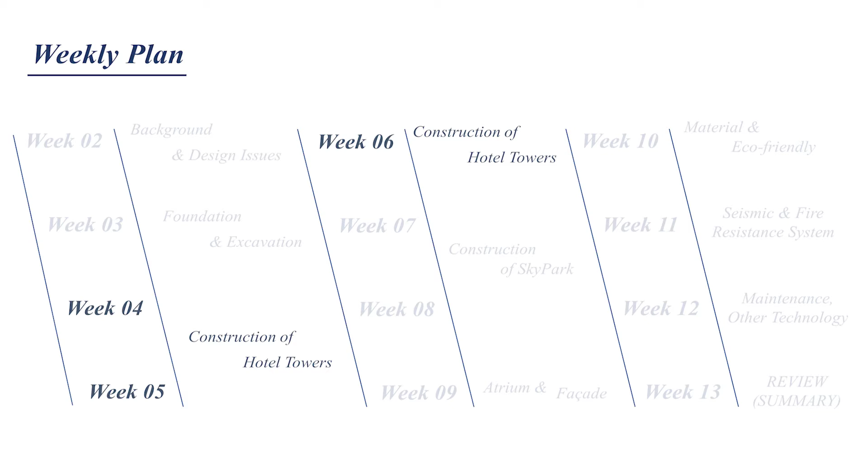The second week, we went through the Marina Bay Sands background and design issues. Last week, we talked about the foundation and excavation phase. Today, we're going to start with the construction of the hotel towers. But before starting this week's presentation, we'll briefly review the foundation of Marina Bay Sands Hotel.

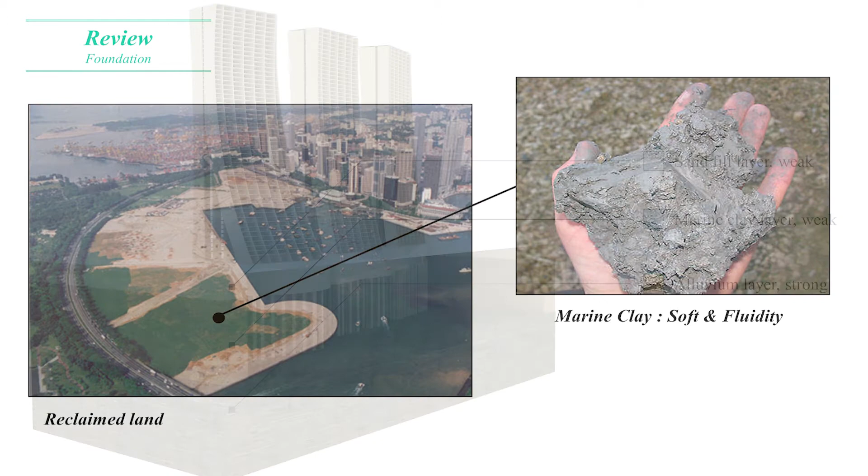The Marina Bay Sands is located on reclaimed land, which is newly created. The land consists of a large marine clay layer. This layer introduced two main problems for construction: one, it was too soft to support the weight of the building without causing large differential settlements; and two, the large horizontal ground pressure.

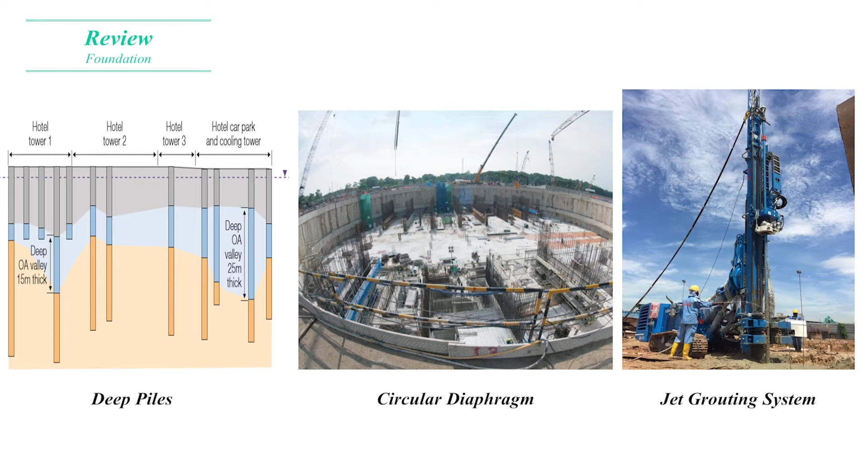We introduced three construction methods used to solve these two main problems: the deep foundation method, the circular diaphragm wall, and jet grouting. Today, we are going to talk about how the hotel towers were built on this foundation.

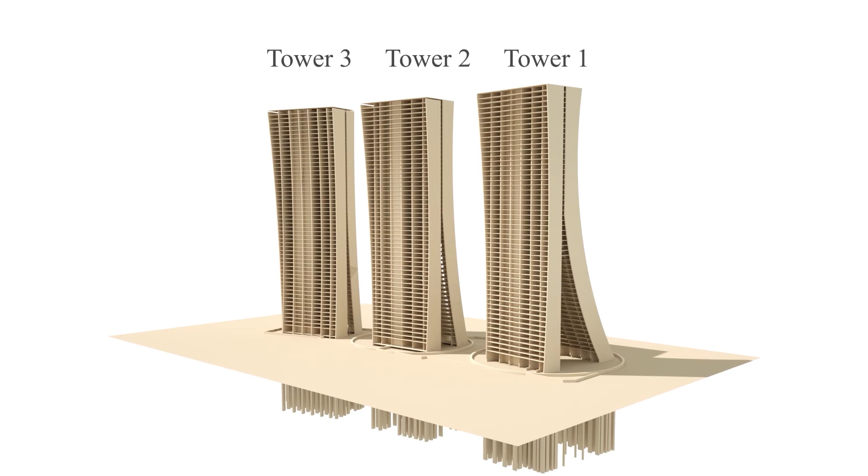The main design concept for the hotel was that the towers should resemble poker cards. This idea was developed into three different hotel towers, each with a unique inclination. Tower 1 has, as a result of this design, a very sharp angle of 26 degrees for the sloping structure. The sloping structure of Tower 1 stands on its own until it reaches the 23rd floor, where it is supported by the more vertical structure.

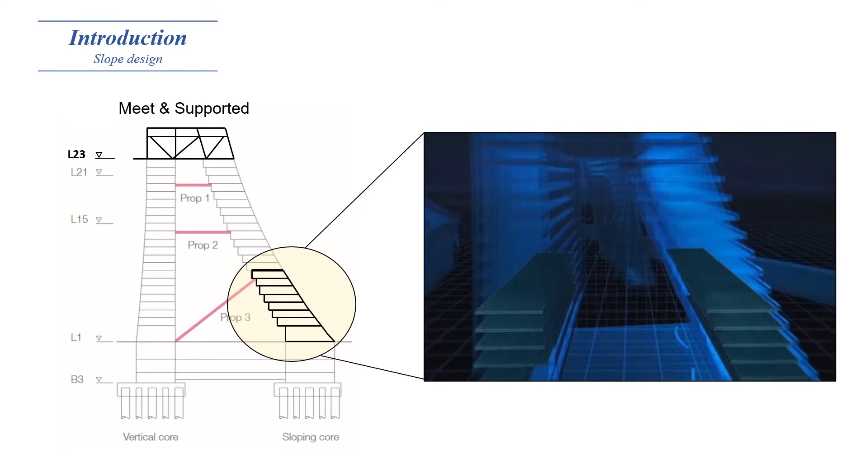According to various computer simulations, the angle is so sharp that the structure would collapse before even getting to the 8th floor. This raised the question of how it was possible to build this without collapsing. Let's think about it. First, how about plenty of columns between each floor?

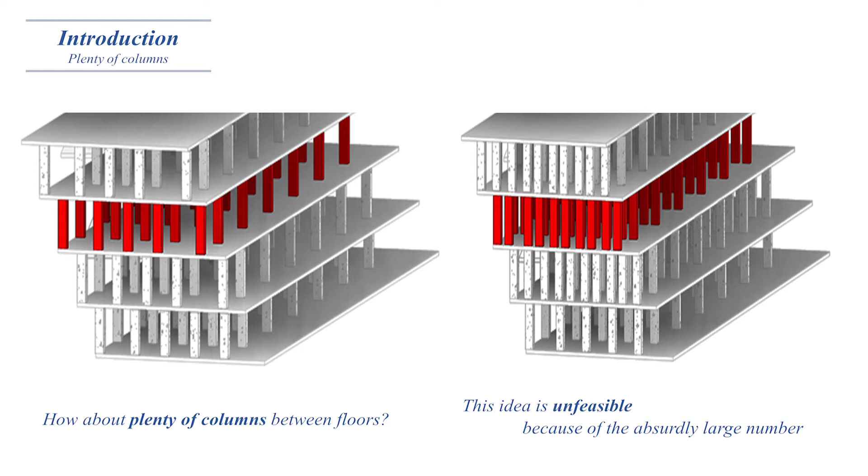The first idea suggested was to put columns to support each of the floors. However, this idea was discontinued as the engineers found they would need an astonishing number of columns, making the idea unfeasible. So how about pulling it from the outside in the opposite direction?

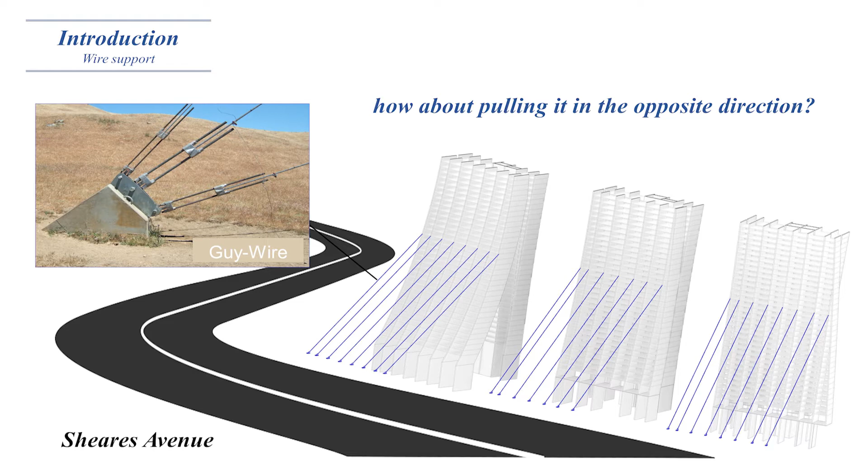The idea was to pull the building from the outside using a guy wire. This idea was very clever, but impossible in real life. Remember, a highway was passing right next to the Marina Bay Sands site. For one, the guy wire would have to be really long to reach the construction site, and two, the wire would have to be anchored at a depth of 50 to 60 meters below the ground surface. Thus, it would be impossible to remove the wire once construction was finished.

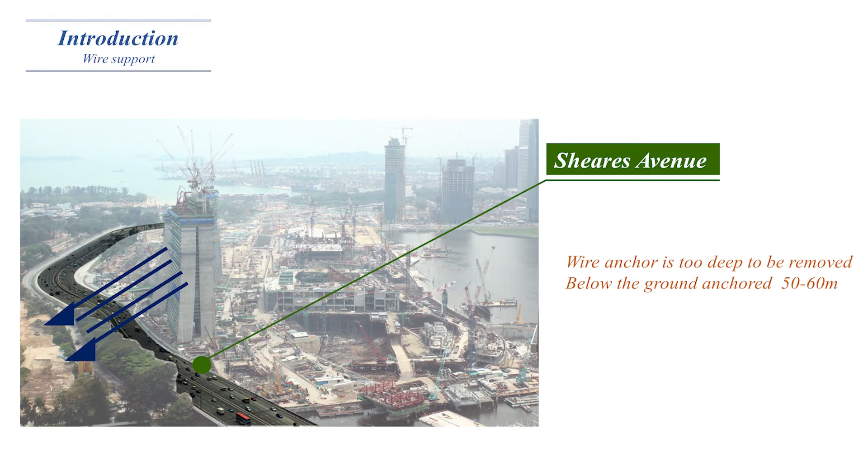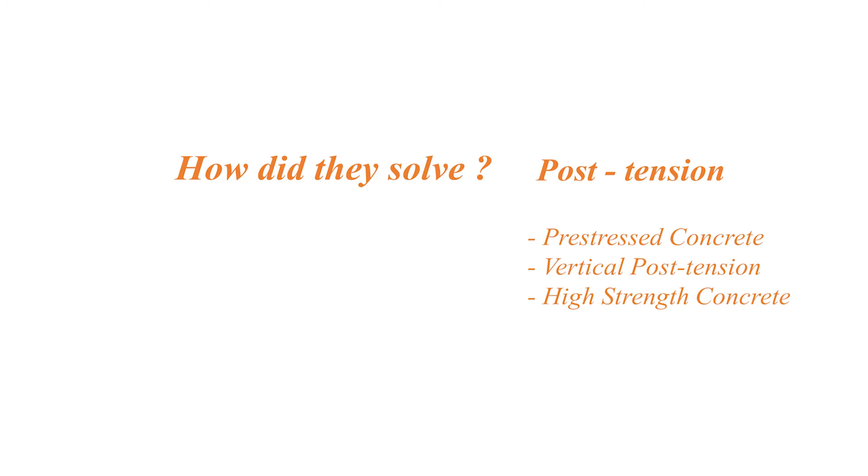The problem was back to square one. Even if this was possible, numerous temporary equipment or structures would have to be used, increasing the cost and construction period. So how did they solve the problem? The key is the post-tensioning method. Let's study what the post-tensioning method is, with three keywords: pre-stressed concrete, vertical post-tensioning method, and high-strength concrete.

First, let's do a simple experiment. Imagine a structure in which a rubber band holds up a number of blocks. If the rubber bands are loose, due to the absence of tensile force, the blocks are easily pulled down, even by their own small weight. However, if tensile force is applied to both ends of the rubber bands, the blocks are much less saggy than before. This is the key principle of post-tensioning.

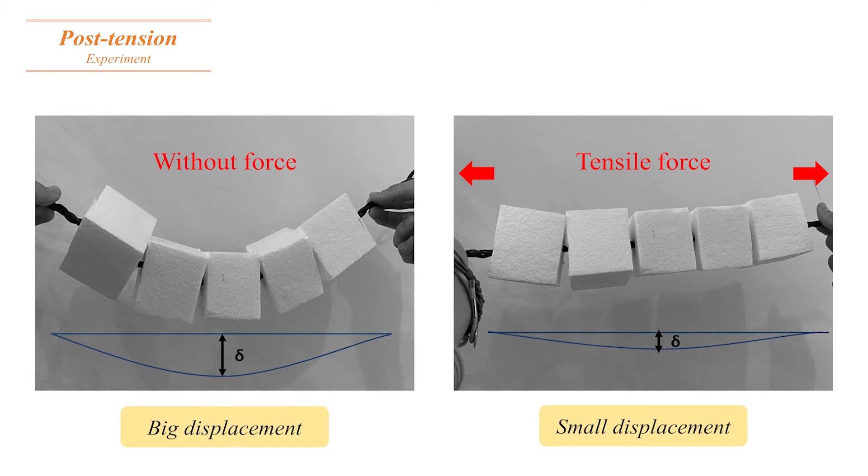Now let's suppose this block is a concrete element. First, let's talk about what pre-stressed concrete is, because post-tension is simply a type of pre-stressed concrete, which literally means applying a compression force to the concrete element in advance before it is installed.

Pre-stressing a concrete structure is pretty simple. First, you stretch the steel to give it a tensile force. Second, you release the steel. Then compressive stress will arch the concrete. Third, when loads are applied onto the concrete, the deflection will be minimized, and as a result, the concrete element can withstand higher loads.

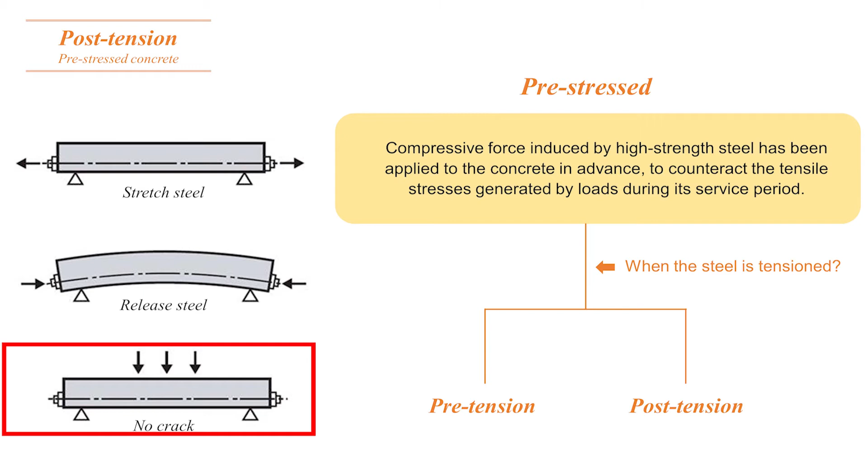Pre-stressing is divided into pre- and post-tensioning, depending on when the tensile force is applied. If the force is applied before casting the concrete, it's called pre-tension, and if it's applied after casting the concrete, it's called post-tension. Let's study the pre-tension method first.

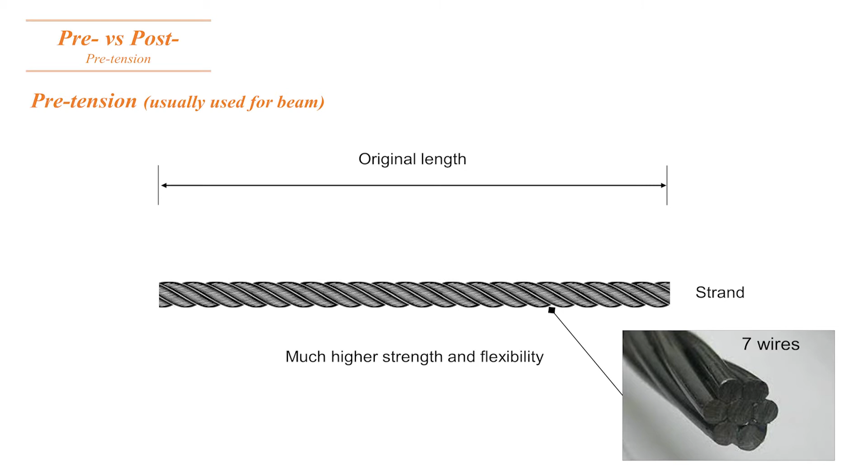This is a strand, sometimes called a tendon, consisting of twisted steel wires. The strand is used to take up the tensile forces into the concrete. The strand is 5 times as strong as a regular rebar rod, and also has the advantage of being flexible.

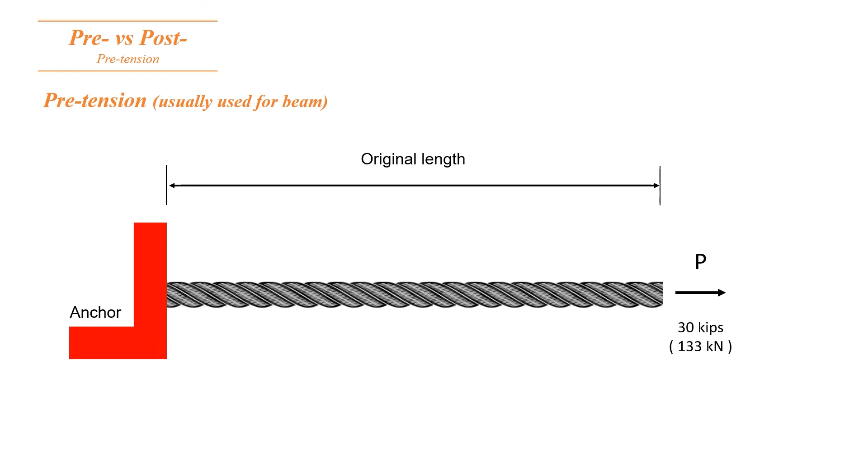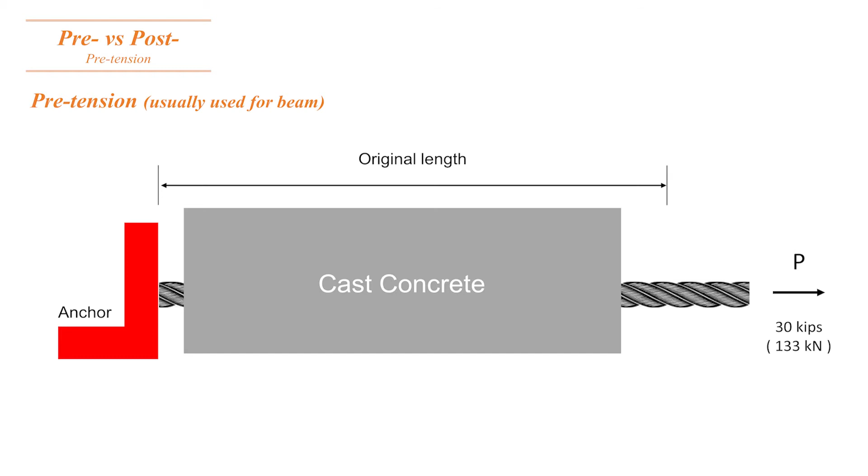At one side of the strand, an anchor is installed, and on the other end, a load force of 133 kN is applied. Depending on the type of element, it's possible to have 70 or 80 strands in a structure. Then you cast the concrete around it and release the load.

And the strand is shortened, applying compression force into the concrete. This is the process of pre-tension, literally pre.

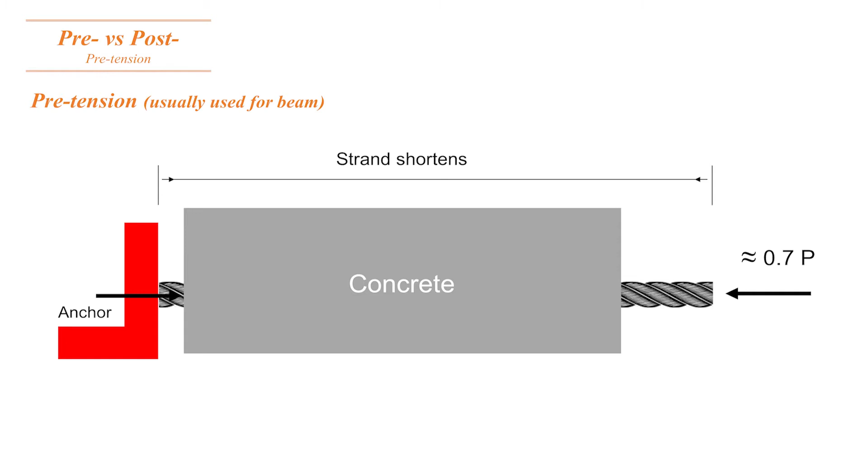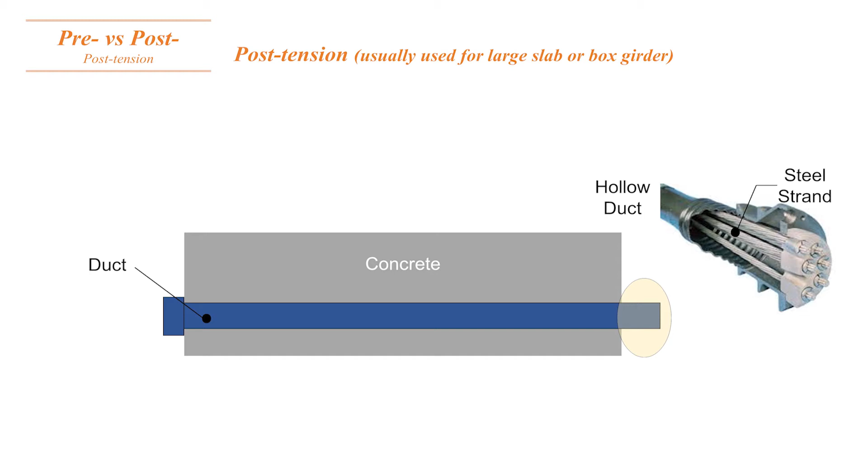Next, let's talk about post-tensioning and how to make the system. First, you cast the concrete with something called a duct. The inside of the duct is hollow. That duct can be filled with a strand or a large number of strands. One side of the strand is fixed with an anchor, and the other side is free.

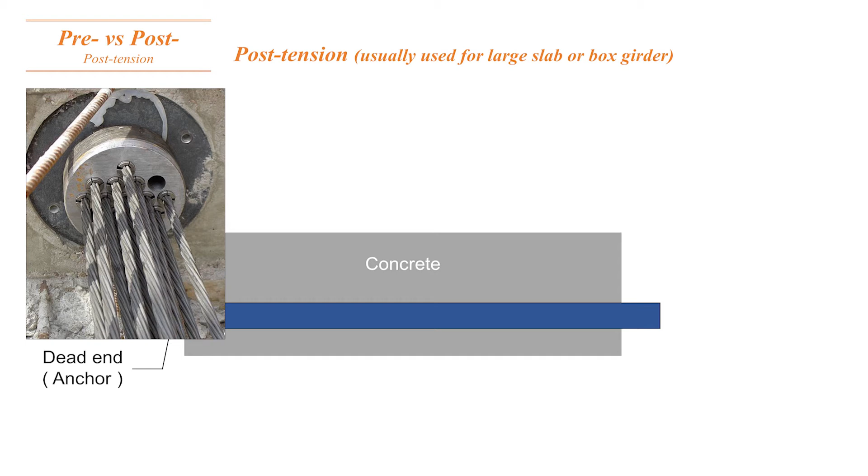Then, the concrete is cast in place, and similar to the pre-tensioning method, the strand is stretched using a hydraulic ram and released, applying compression force to the concrete. One thing different from pre-tension is that the concrete is cast in advance and then tensile force is applied.

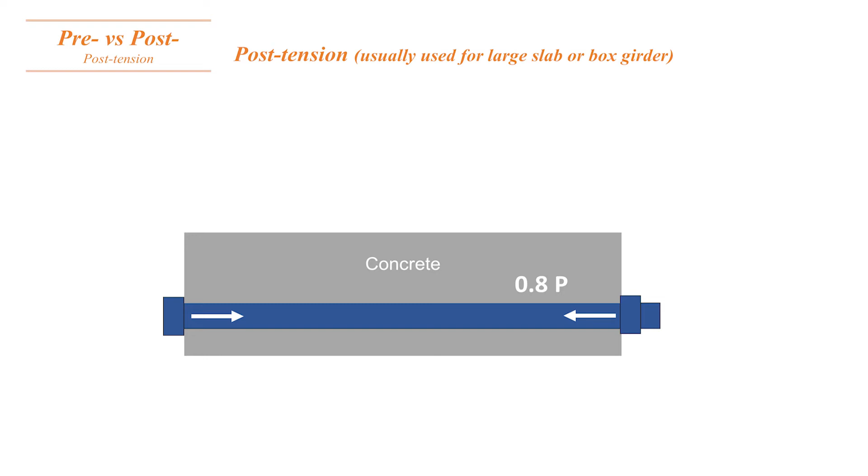To summarize, pre-stressed concrete is divided into pre- or post-tension depending on the time of casting the concrete. Pre-tension is mainly used in factories because it needs a stressing bed, which enables mass manufacturing and high reliability of quality. However, it's not possible to make a large member because it's difficult to arrange the tendon or strands into a curved shape. Therefore, it is used to make beams that are repeatedly used again and again.

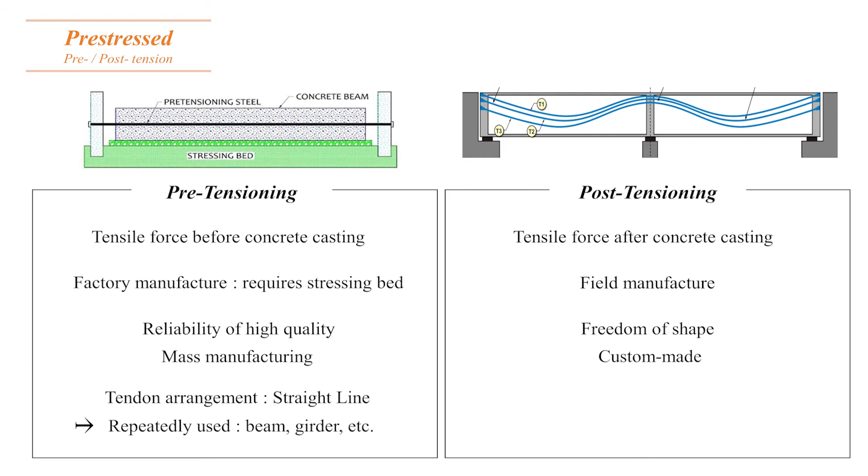Post-tensioning is used in the field and can freely customize its shape because tensile force is applied after casting the concrete. It's mainly used for large structures, such as slabs, because it's possible to arrange tendons into a curved line. The floors of the Marina Bay Sands were designed with post-tension concrete, with a maximum span of 10 meters.

They can eliminate the need for internal columns and reduce temporary structures, construction costs, and construction periods. This post-tension slab provided the lightest combination for the horizontal and vertical structure. However, this only solves the problem for the floors. The collapse caused by the steep slope of the building was still the biggest problem that hadn't been resolved.

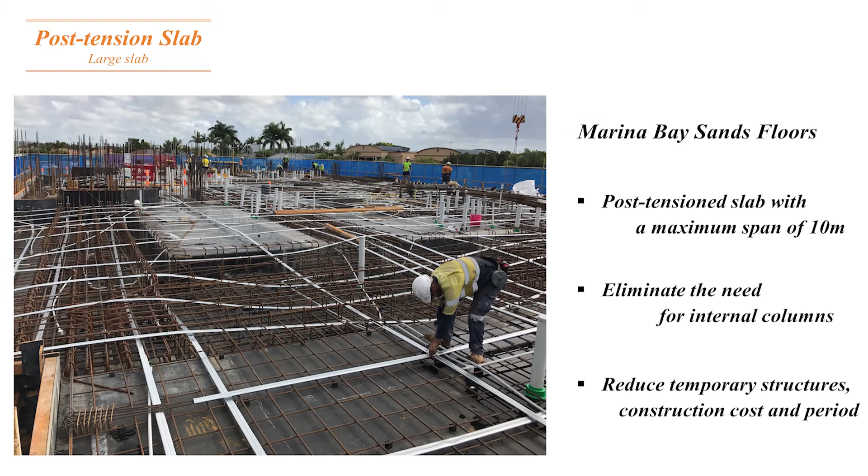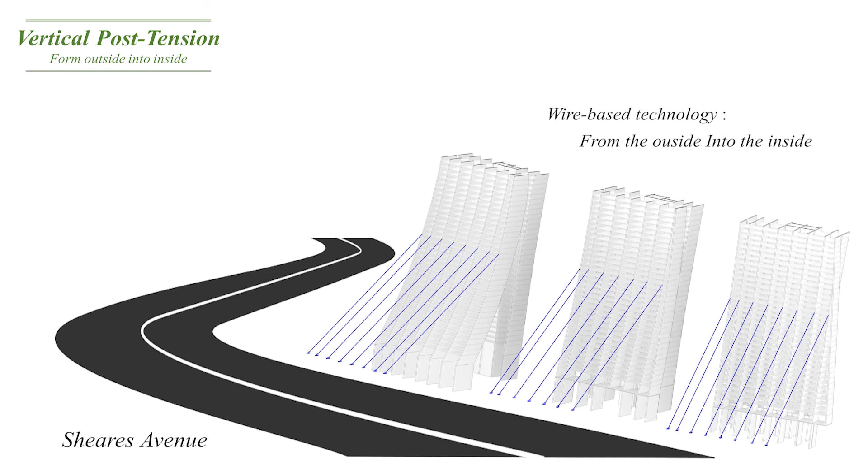From a big perspective, wire-based technology was used to solve the problem. But how did they solve the slope obstacle? The biggest difference was inside, not outside. They decided to pull from the inside instead of pulling from the outside of the building. In other words, the new idea was to use the post-tension technique slightly differently.

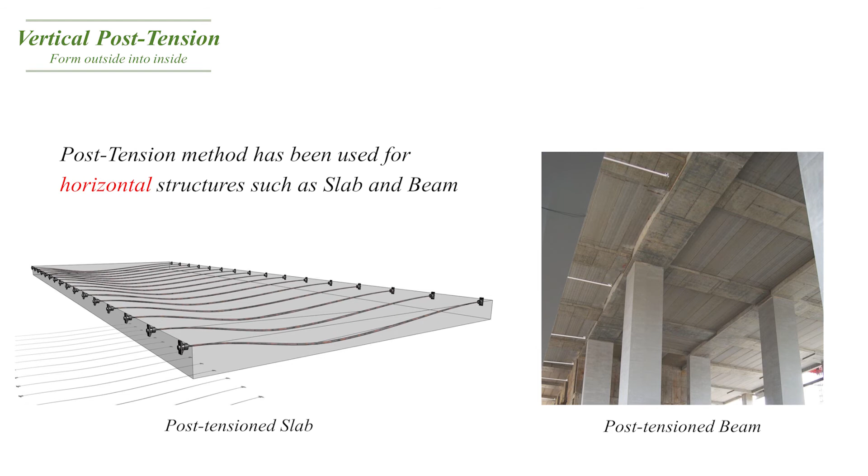The post-tension method, however, had never been used to erect a building before. Usually, it's used for horizontal structures such as slabs and beams.

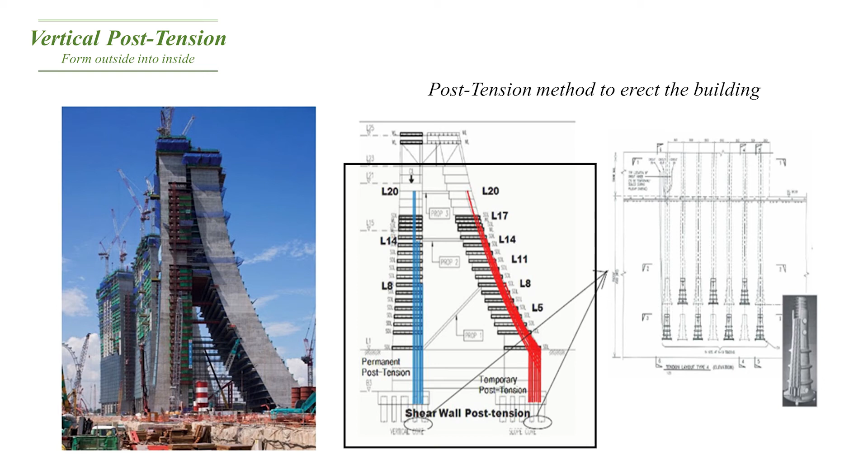The steel strand is placed and runs up inside the shear wall, making it invisible once construction has been completed, and maintains the intended shape of the building. The steel strand is pulled through every wall and tightened. This is the vertical post-tension method.

It was the idea of Ssangyong Engineering and Construction in Korea. This was the biggest reason why Ssangyong E&C was selected at the time. And the vertical post-tension method was registered as a new construction technology, number 608.

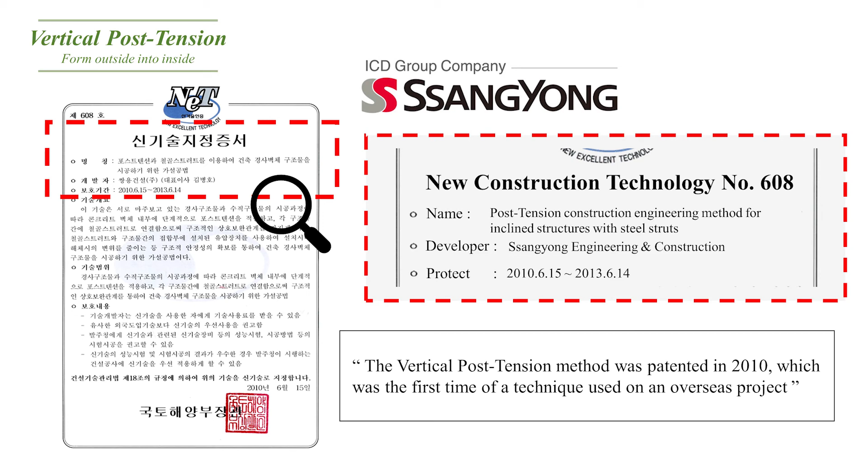The steel strand was installed inside the wall of the 20th floor, and tensile force was applied every time the building went up a new floor. There were a maximum of 96 tendons installed per tower. One wall has 12 to 14 tendons installed and can support about 400 tons of loads. The anchors were installed 4 to 5 meters below the ground surface.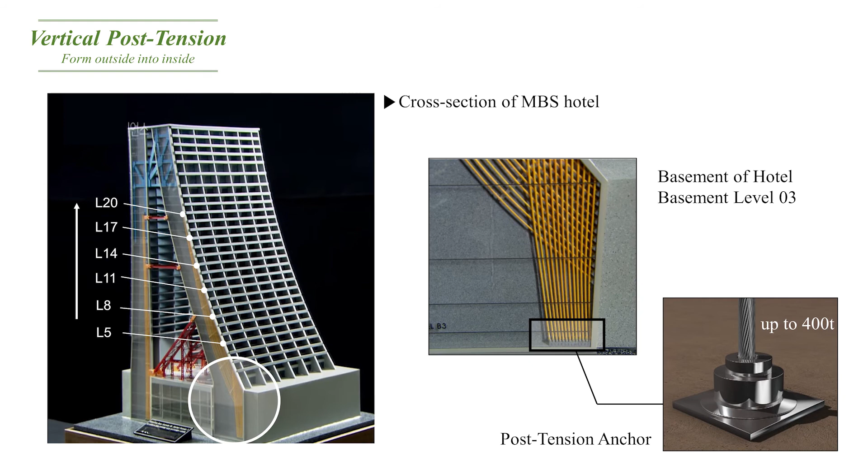This is a model experiment of the vertical post-tension. As you can see, if the strand is pulled, the building will stand upright. But this results in another problem.

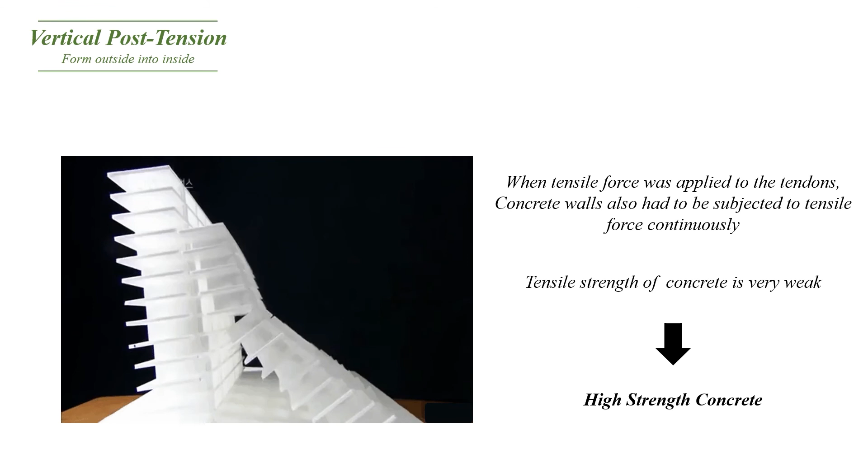The tensile force is not only applied in the tendons, but also continuously in the concrete walls. And as you know, concrete is very vulnerable to tensile forces. Therefore, the building had to use high-strength concrete. The strength of concrete used on the RC walls of the tower is 60 megapascal up to the 40th floor.

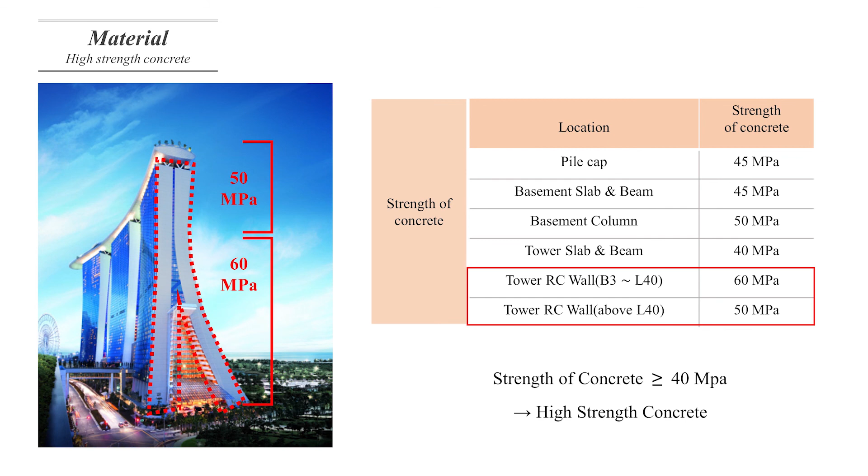Concrete with a specified strength of 40 megapascal or higher can be defined as high-strength concrete. The strength of normal concrete used in general buildings is usually 30 megapascal and can bear loads of up to 25 tons. The strength of the concrete used in the Marina Bay Sands towers is about 50 megapascal.

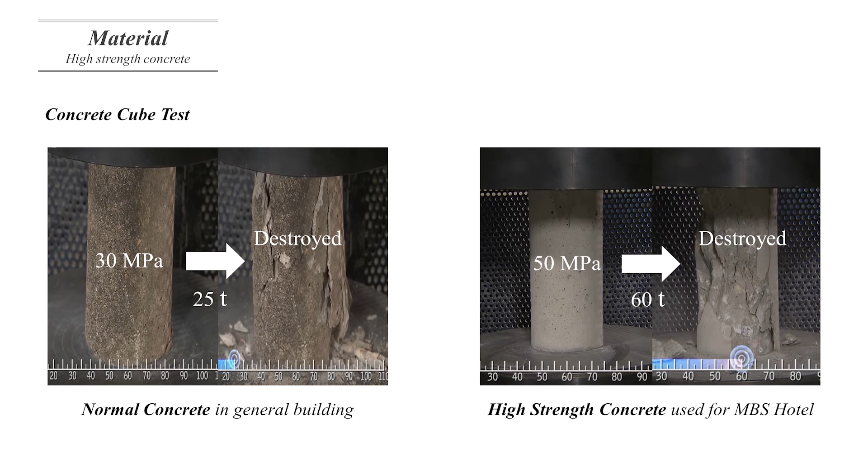This high-strength concrete can bear loads of up to 60 tons. Additionally, 100 megapascal concrete was used where the anchors were installed, which can withstand loads of up to 92 tons. To summarize, the post-tension construction method and the high-strength concrete made it possible to overcome the design for the steep inclination.

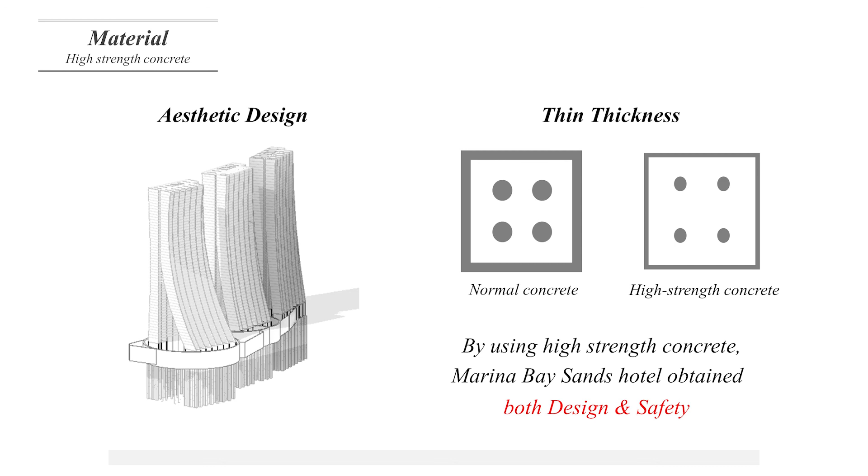By using this high-strength concrete, the thickness of the building could be thinner, and the building could be built lighter, achieving the aesthetic function. Therefore, thanks to the high-strength concrete, the building could obtain both design and safety requirements.